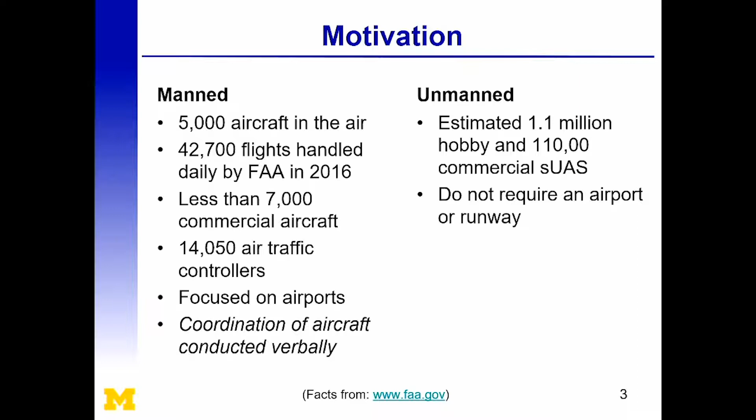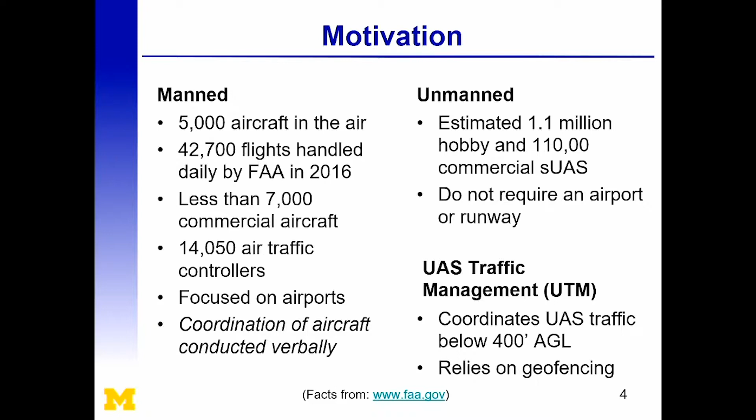So then that brings in, what is geofencing? Geofencing is the idea that we can create a three-dimensional box around a drone and then confine it within that space. So if you're flying in your backyard, you put one up around your property boundaries and you say, okay, as long as my drone respects my geofence, I don't have to worry about the neighbor's house or interfering with any other air traffic that's in the area. It also works in reverse. So if you're living next to an airport, there can be a keep-out geofence that prevents you from getting too close to where the manned aviation is.

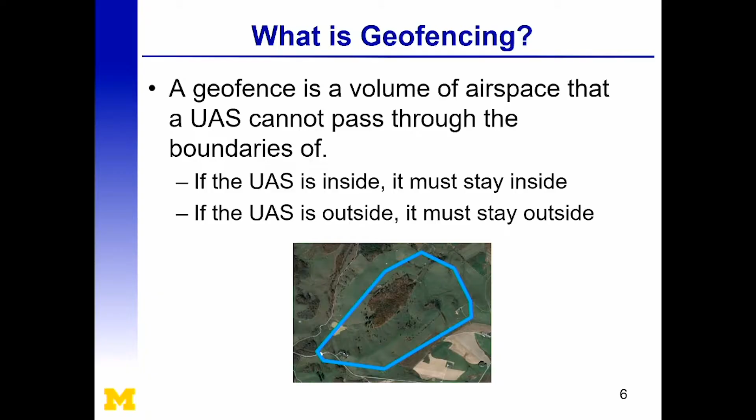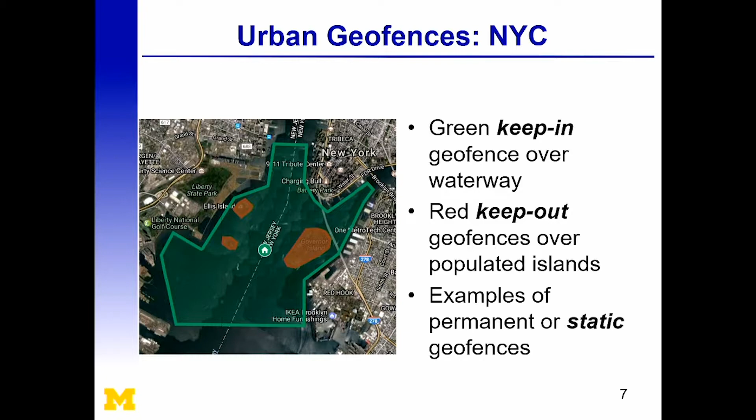So this is a subsection of the area near New York City. If we imagine that this green area is a keep-in geofence, then the idea is that you can have traffic going across the river back and forth. As long as it stays within the green area, it's allowed to be flying there. What you see in the red are examples of keep-out geofences. I've put those over islands that exist within this river, the idea being that you don't want those aircraft flying over a high population area. So if you tell your drone where the geofences are, it can fly anywhere within the green and it'll avoid the red areas, and you can safely operate within that space. And these are all based on physical markers that are always there: there's always people on the islands, the river's always there.

This is an example of permanent or static geofences. If we then imagine that there is an emergency vehicle that needs to cross this area, say it's a helicopter or an emergency flight or a police vehicle that needs to get from one side to the other, it can come in and say, hey, I need this airspace because I need to transit through here quickly. And so in that case, it actually overrides the boundaries that are already there for the period of time that it's going to occupy that airspace.

To make this the most useful system possible, we're focusing on non-convex. We're not enforcing any convexity requirements, so the horizontal boundaries of our geofences can be any shape we want. And we do want these to be enforced, time-dependent geofences so that you can trust that nobody else is going to violate your geofence, and that geofences only exist as long as they need to exist to keep the airspace less cluttered.

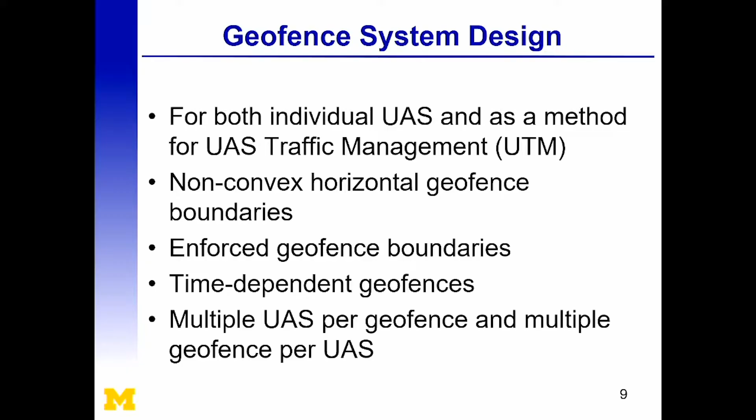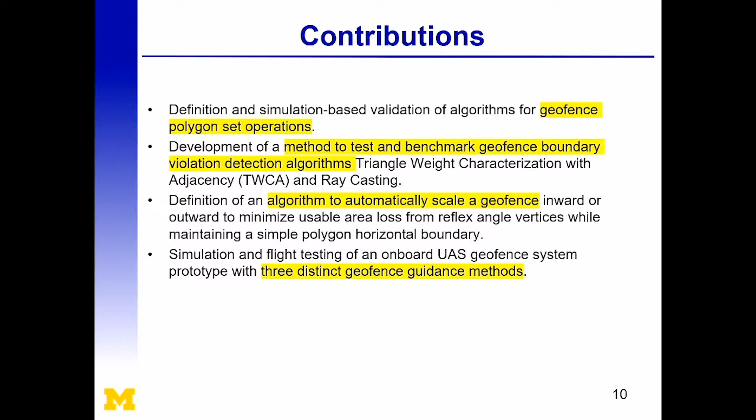The contributions of this work are using polygon set operations within this interface to track the creation of these geofences. We've developed an algorithm and a benchmarking method for detecting whether or not a geofence is being violated. And we've defined an algorithm to automatically scale geofences inward and outward to maximize the usable airspace and to be able to provide warning layers, which I'll get into in a bit. And we've also done a lot of the simulation, and we've implemented 3 distinct guidance modes. So that's the response to when a geofence is potentially violated. Again, all of this we'll get into a lot more.

The innovations are, in fact, a formal definition of the UAS-centric geofence, which has actually been missing in the community so far. Most of the work that's been done, everybody's coming up with their own locally used definitions. So we've designed one that should be adaptable to any use cases. These are 4-dimensional geofences, and we have a way to store them within a centralized system so that we can track at any given point in time which geofences are and are not active.

We have a custom algorithm called triangle weight characterization with adjacency that allows us to quickly, over time, track exactly where we are, which is faster than the normally used algorithms. And we have a guidance mode that's been unique to us and actually been picked up throughout the community called local Loiter, which is the idea that when you detect a violation, you don't just stop where you are, you don't fall out of the sky, you actually back off from the geofence before returning control back to the users.

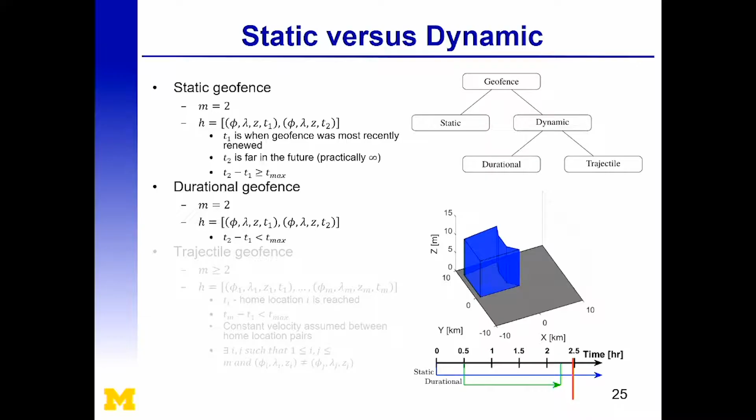Okay. So then the final term is our add IDs function, which is our permissions function. This is saying who is allowed to access this geofence. So if it's your backyard and you're the only one that wants to fly there, you're saying, okay, only my drones can fly here. But if you're friends with your neighbor and you say they can fly here too, then you have your drone's ID number and your friend's ID numbers.

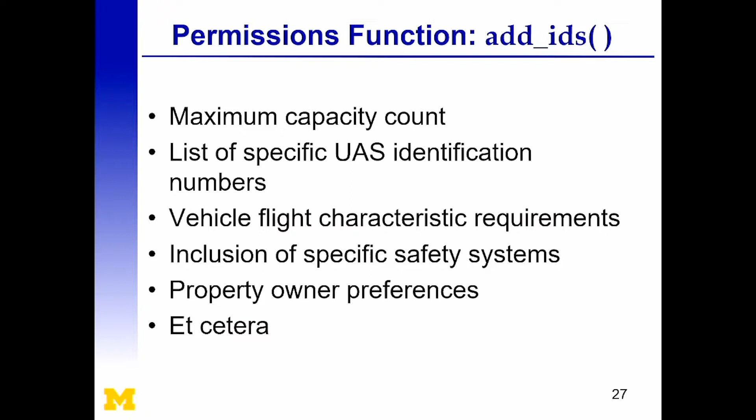For more open public spaces, maybe your local flying field, you have to be a member before you can fly there. So you have to get your ID on that list, and then anybody who's a member can fly in that area. Alternatively, it could be like a public park where no more than 10 drones can fly here. So when you request that geofence, the system checks whether or not it's already at capacity, and you potentially have to wait until somebody else lands before you can take off and use that geofence.

And so this is really where a lot of the policy that's going to be springing up around these geofences is going to be enacted, which goes into property owners' rights and who can fly where and who has that ability to determine that. And so that's all encompassed within the add IDs function. So that's how we implement it for an individual vehicle.

How does it look from the system side? Again, we're going to stick with the same definition. Our first task is we want to be able to track both the geofence and the vehicles that are occupying those geofences, because it's not just what airspace is used, it's who's using that airspace. And so to do that, we're defining our UTM system with geofences that are sorted temporally and then spatially deconflicted.

So I'm going to go through the temporal side, and then I'll go to the spatial side. So we're going to divide this up into temporal periods, which is just a space of time where all of the geofences are constant, so there's no change within that space. And it's defined based just on a start time and a list of geofences that are active during that time period.

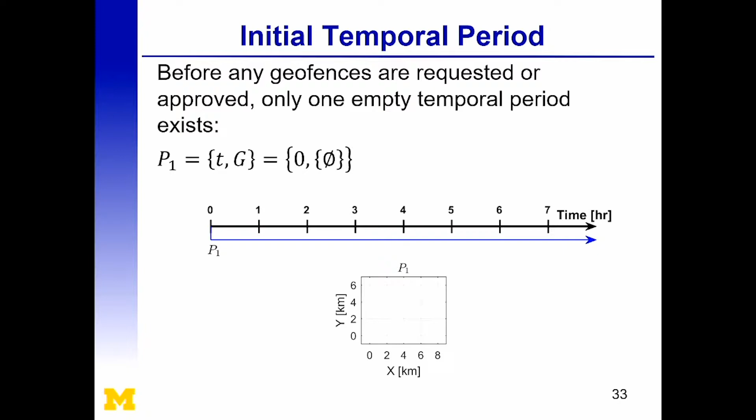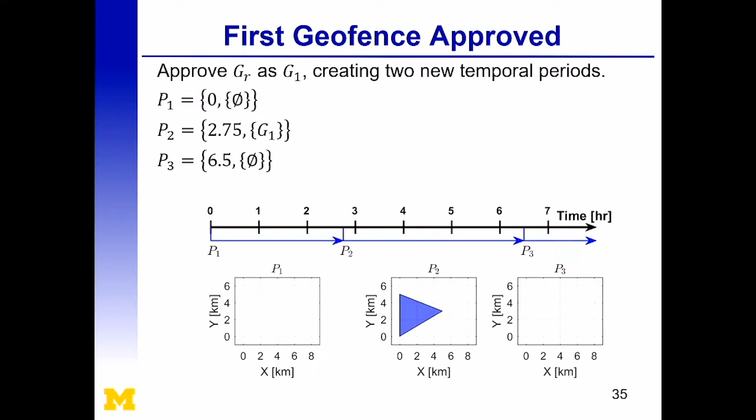When we first turn on the geofence system, you have a single period and it starts at 0, and there's nothing there. No geofences have been requested yet, it's just an empty period. So then we have a first geofence request, it goes into the system and it says, okay, can I have this airspace? There's no other geofences active during that time, and so that becomes part of it, and we now have 3 temporal periods. One for before that geofence exists, one for while it exists, and then another for after it exists. So a single case, okay, easy enough.

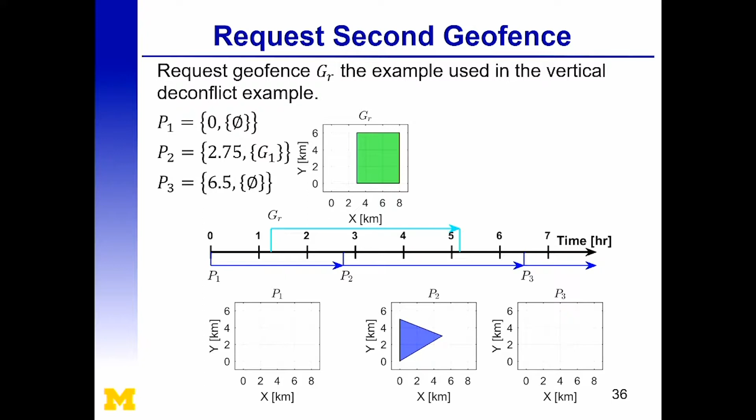Then we get a second request that overlaps but doesn't actually align with any of the same time boundaries. And so when this gets approved, we actually end up with 5 different temporal periods where numbers 2 and 4 have only a single geofence occupied, so those are the full boundaries that are requested. But the interesting one is down here in P3, which is where the spatial deconflicting is going to come into play.

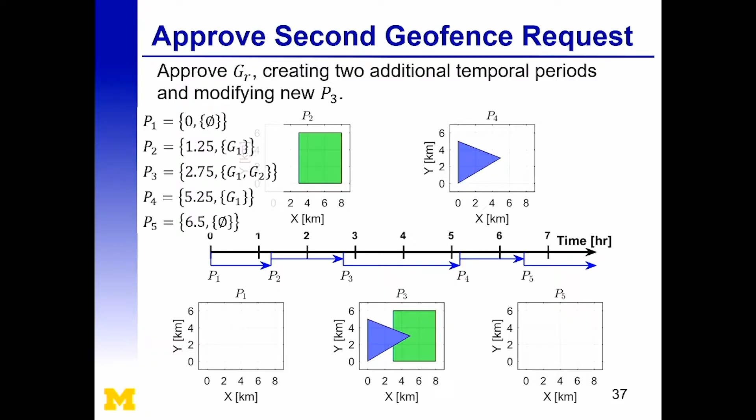So with those geofences that are now created, who has permissions to fly there and how do we track that? With our permissions constraints, we look at each of them and we create a list of the active or scheduled users for that geofence. And so for our timeline, what that really ends up looking like is we have a list for each of the periods with an entry for each of the geofences, and within that is the list of UAS that are active within that period. Okay. So that's how we're tracking who's using them or who's scheduled to use them, and that allows for the monitoring of the airspace itself.

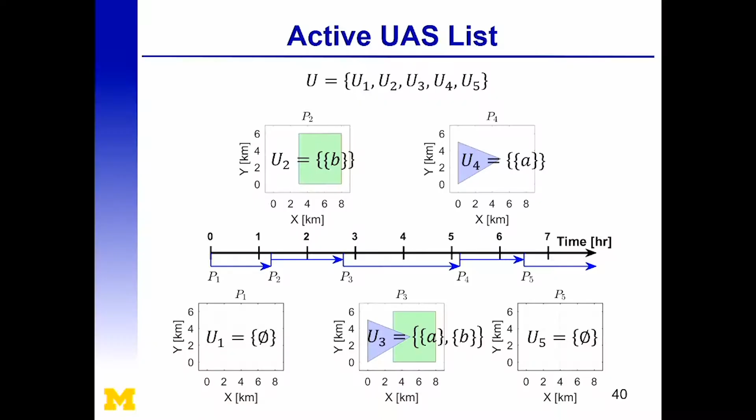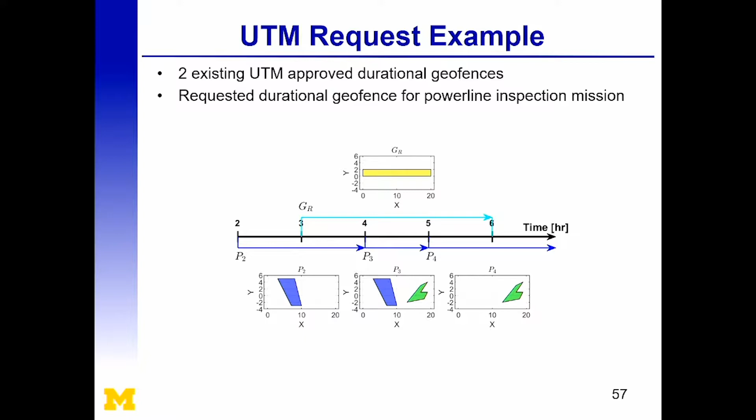So another example to hopefully solidify this a little bit more: for this one, we're imagining that the ones on the bottom here already exist and are approved within the UTM system. And so then we're requesting this lovely yellow geofence that is intended for, say, a power line inspection. And so we ask for that geofence. And then when that is approved, we get, again, separated out into 5 different temporal periods, where for each period, the yellow geofence is deconflicted from the existing 2 geofences.

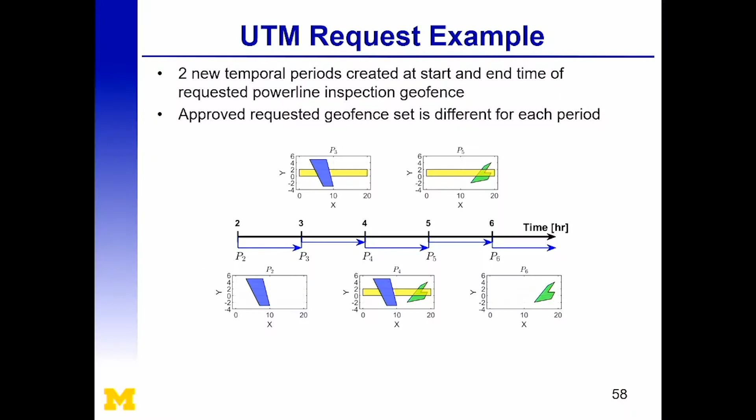So what this looks like in 3 dimensions, because we're flying in 3 dimensions here, we get this area where for the first hour of the existence of our survey geofence, it's actually separated out into 2 different disjoint sections, which means you can't actually fly from one to the other with the currently requested geofences. When we get to P4, it's even more broken up, but because the vertical boundaries of the green and the yellow are different, you can actually possibly hop over the green if you change your altitudes there. And then with P5, you finally have access to that center section and can make it across the whole area.

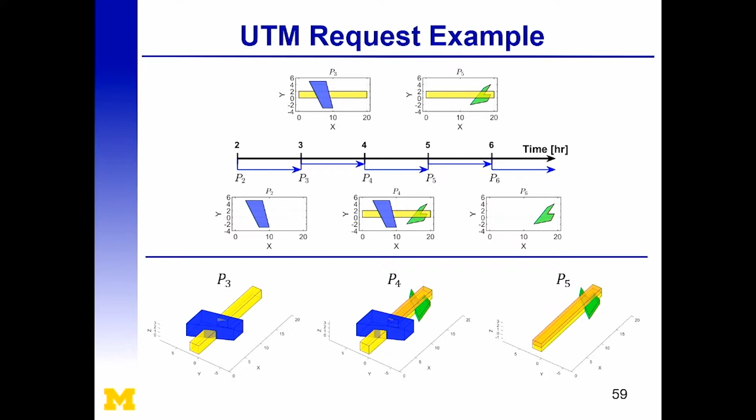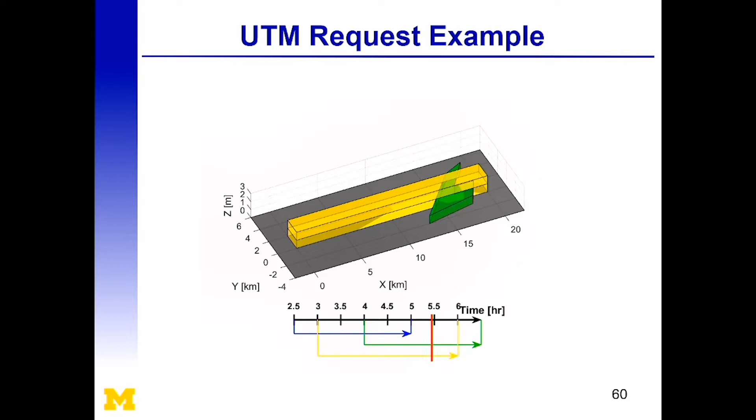So 3-dimensionally, what this looks like is here you can kind of track what's happening. They appear, and then as blue disappears, we then have that space. But at no point in time do we have access to the entirety of our requested area. Over time, we can access all the different components, but we can't actually access them all at the exact same time. And so then what that looks like is if you assume that you have to start from 0 and proceed to 20, maybe you're surveying something over on the side, then you start off there and you have to go slow so you don't hit that blue boundary.

So here we go again. Okay, so you're going really slow so you don't hit the blue because you don't have permission to fly there, and so you're waiting. And then as soon as that disappears, you have to make it all the way across for the rest of your time, and so you're racing much faster then, and then hopping up and over that green boundary because it's taking up where you want to be flying, but you have permission to go up and around, and so you do still get the entirety of your area that way.

The other way to do this would be if you can start from the other side, then suddenly you can make it across from where the green's going to and survey that area first at your desired altitude, and then just wait for the blue one to disappear to finish the rest of your survey. And so this is the simple 1 vehicle case. Especially if you start adding more vehicles and more varied flight plans, there are an infinite number of ways that you can cover this same area. But this is the simple idea of how they interact and how it is going to impact the flight plan of the people that are actually trying to use this airspace.

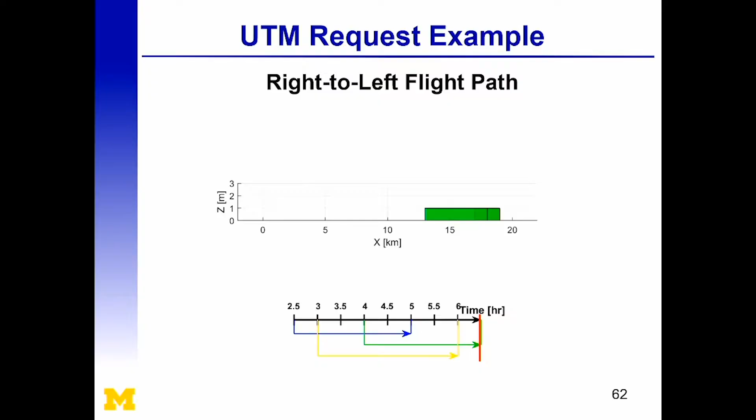So that's our high-level introduction to what is the geofence, what is our formal definition of it, and how are we tracking them compared to each other. So the next couple sections are going to be focusing on a single geofence at a time so that we can really get into the nitty-gritty of how does it work for the vehicles that are running this system. So to do that, we start off with our boundary check algorithms. This is how do we determine whether or not we're respecting our geofence boundaries.

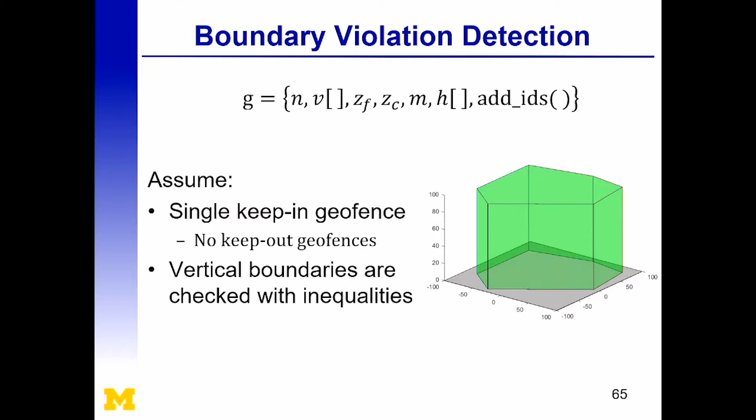So we start off again with our geofence definition and a single keep-in geofence, where again, we can just check the vertical boundaries with simple inequality. This is actually just an application of the point in polygon problem, if you're familiar with that from computer vision or graphics or computational geometry. And so the most commonly used method is ray casting, and the one that we're proposing as an alternative is triangle weight characterization with adjacency. I'm going to kind of fly through this section, but if you want more information, it's in papers.

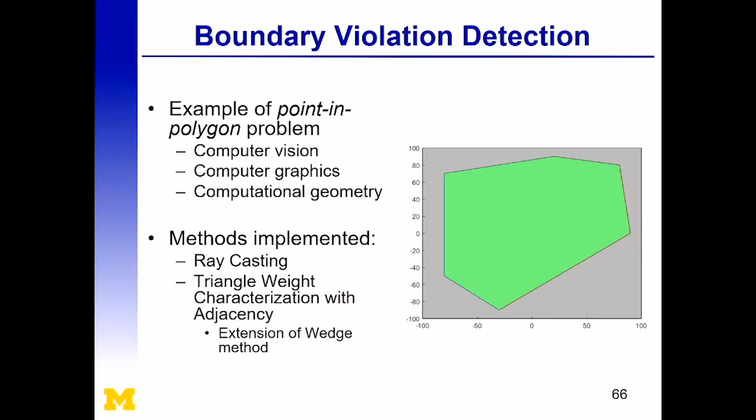So triangle weight characterization: we start off with our funky polygon, and we divide it up into triangles. Once you have triangles, because it is a convex hull in 2 dimensions with 3 inequalities, you can determine whether or not you're occupying any of the triangles. And then with that simple check of whether or not you're in a single triangle, what we actually want to do is then create a graph.

Because we're a vehicle moving through space and we are not teleporting, we know at any given time we're probably pretty close to where we were previously. So as we fly through here, we're assuming we're always within the same triangle, or we're doing a breadth first search of the adjacent triangles, where adjacency is defined as a shared edge. As we continue to walk through, it's fine, but if we violate our boundaries, we have to suddenly check all of the triangles for containment before we know that we're actually outside.

To remedy this, we add a bounding box around it, which is just a simple rectangle that we again divide into triangles, and then we add that into our adjacency graph. So now we know that even when we're outside the geofence, we're still somewhere within that graph. And if we make it beyond that bounding box, things have gone very wrong already, but the bounding box can be checked with just a simple series of inequalities, so it's a very quick procedure.

The number of triangles here is still just scaling linearly with the number of edges, so our runtime is still very contained, which is what we're looking for, because ideally this is running on board at the same or a very similar pace to what your autopilot's running at. And so that is where this is letting us really go, and it lets us be a lot faster.

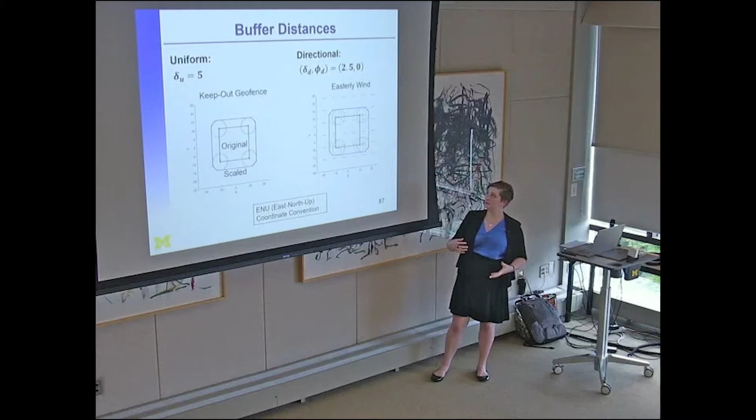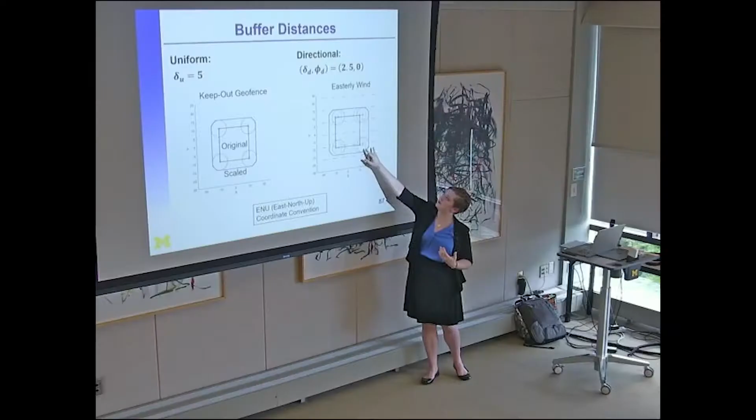And so here we've got an easterly wind, so if this is a keep out geofence and you're flying towards it, because you're with the wind, you need more space to stop, right, or to turn back. And so that's why it's a larger distance here than it is over here. So we have the same uniform distance all the way around with that additional padding on this side to account for that wind and that directional component.

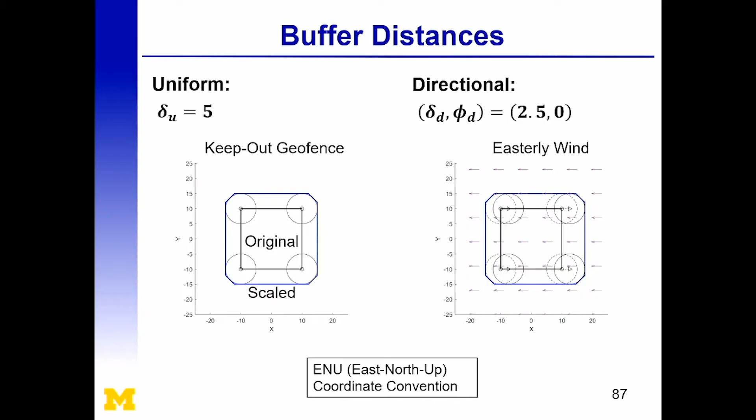So how do we calculate this? For hover-capable vehicles, which is your quadrotors, your octocopters, whatever your custom build is that can just sit up on its tail, for the uniform, we're just using a simple distance with assumed constant acceleration calculation, which is pretty straightforward, you'll probably recognize this from high school physics. It's just our airspeed squared over twice the acceleration that we're going to be commanding.

Then for our directional component, we're using the same equation, just with the addition of wind, and then we subtract off our uniform buffer so that it's only in the direction. We only apply this on the side of the geofence that we want it to be on.

Where it gets interesting is when we look at the directional side. To do this, we're looking at the aircraft equations for doing the turn within wind, which is what you see up there. And then if we look at the velocity component of that, we can solve it for t, and that gives us the additional time required where if you're flying with the wind, so moving faster than what your airspeed's reading, this is the time that it takes for you to make that first turn and to stop your forward progress in the wind.

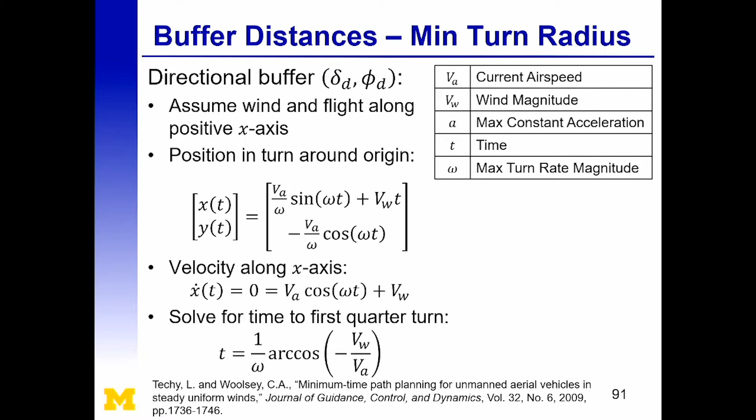So for fixed wing, this is how we would be determining our uniform buffer and our directional buffer. And because we have these equations for both vehicles that are capable of stopping and coming to a hover and those requiring a minimum turn radius, we can then use these buffer distances moving forward in our calculations.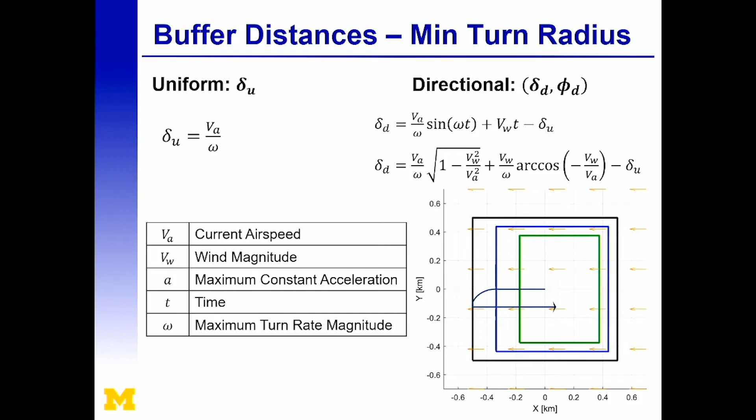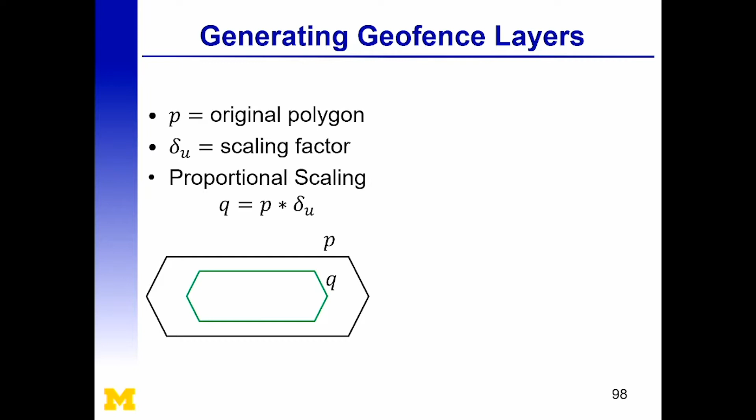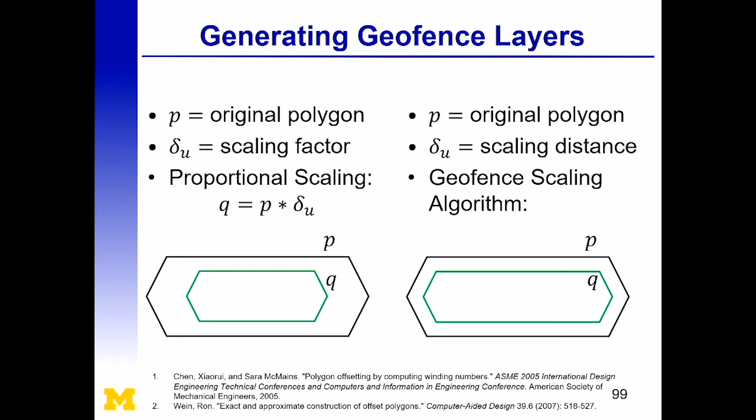So to actually scale the boundaries, we can't just take the vertices and multiply them by our desired scaling factor, because for non-symmetric boundaries it doesn't work, and especially once you get into our concave messes of geofences, it doesn't work at all. And so what we actually do is we go edge by edge and scale them inward by our distance, so it's consistent through each of the vertices as much as possible.

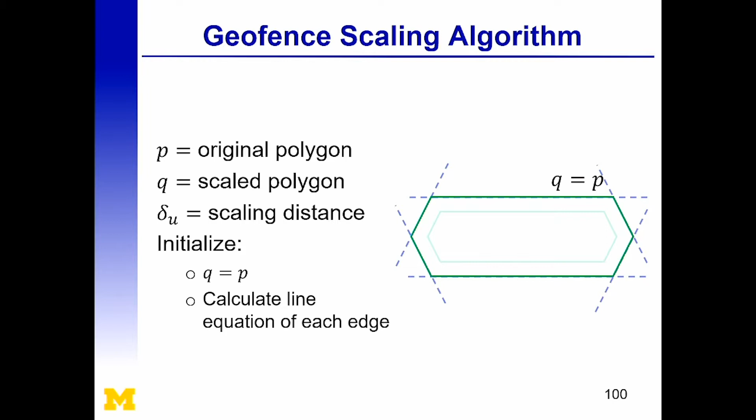And so to do that, we start off by just analyzing the existing polygon and noting the equations of each of the edges. And then from there, we take each of those edges and we project them either inward or outward, depending on which direction you want to be going. And what we really focus on preserving is that the slope of each of the edges is preserved as we move inward. And so by keeping that same slope, we define the new vertices as where the new intersection points are between each of those edges.

And this is really where the smoothing helps, because once you're projecting inward, if there's edges that are too short, the projection inward kind of closes them in on themselves; that smoothing gets rid of it, so then we do have this nice, simple inward movement.

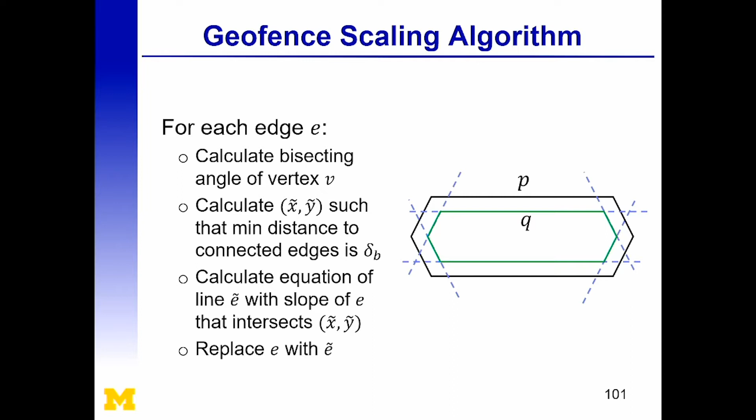And what we're going to do is we're going to add an additional vertex at each of those points, so that we actually end up with a flattened edge across each of the vertices that's perpendicular to the angular bisector of the original angle. And so what that lets us do is we regain a lot of usable airspace. The optimal implementation would be to use an arc, but because one of our design parameters is that we're only using straight edges, this is our solution.

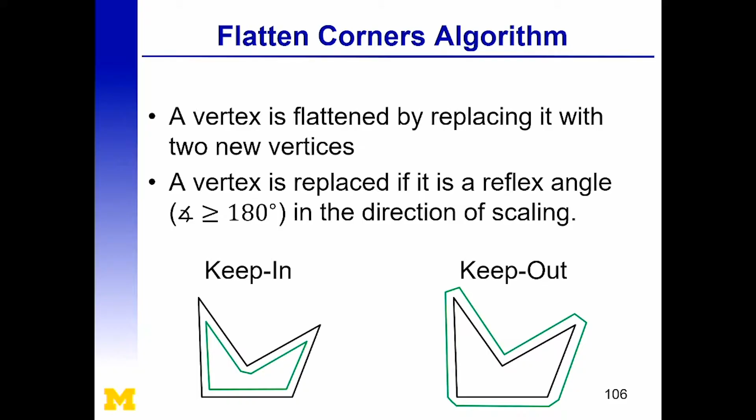And that's what cross-check is doing: we start off and we look at where our scaled boundary intersects with itself. We divide those into their own little subsections, which we then recombine to create the polygons that make up our scaled version. And from there, we can check to make sure that the vertices and edges that define those polygons respect our desired buffer distances, and then eliminate any of the ones that don't comply. And so with the addition of this final step, we can retain the two sides without having to redefine the original geofence to eliminate the narrow passage between them.

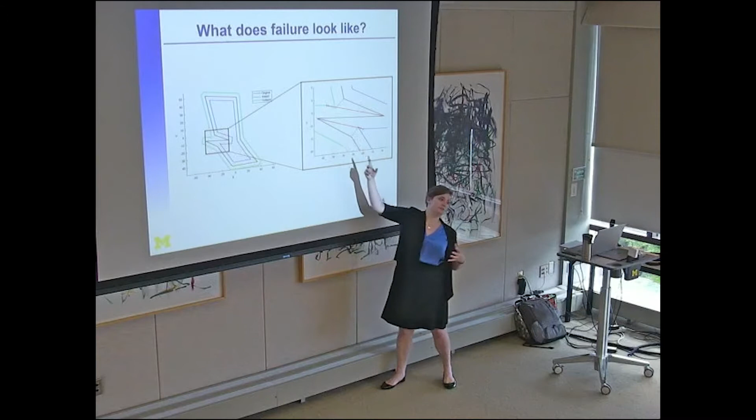So green is our outward scaling, and the red solid line and that dotted line are connecting the vertices from before and after they were scaled. And what you're seeing is that little cross up there tells you that you've actually caused a switching in the order of vertices that's led to this little bitty nub being too close to the original boundary. So that's why that is a failure case.

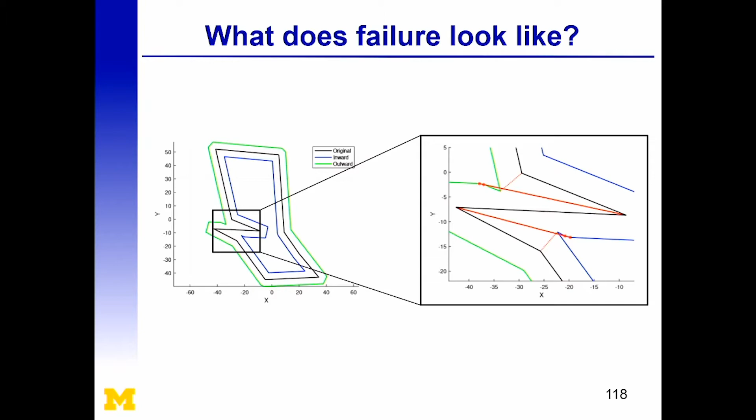We see the same thing over here with blue, where the red lines cross, and it's what most of our failures look like for this data set. And what this is really telling us is that our smoothing algorithms can be improved, because if this was properly smoothed, then this edge for our inward scaling would have been removed, and this would have just been a single vertex instead of the 2 we're seeing here.

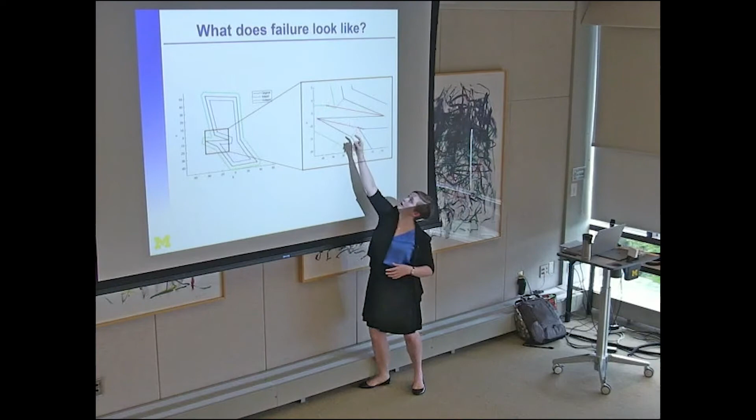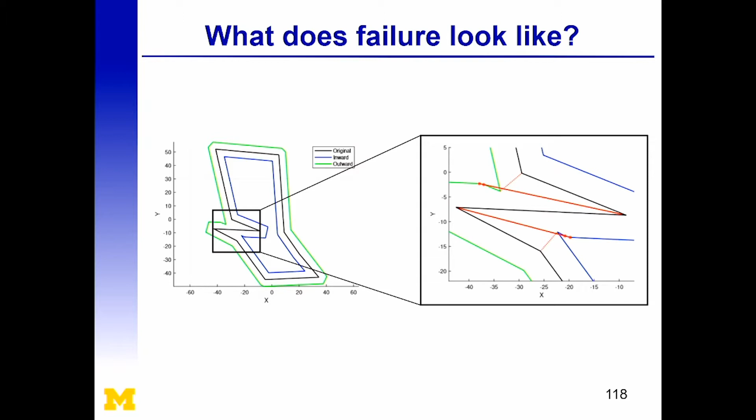And for the outward case, it would have removed this upper black one that I can't quite reach. But that would have, again, reduced this section down into just one vertex, so there would be no edge to cross itself there. And so that does suggest that there's additional work that can be done in the smoothing to further improve these results numbers, particularly on the far side of these graphs. But those are the failure cases that we're seeing.

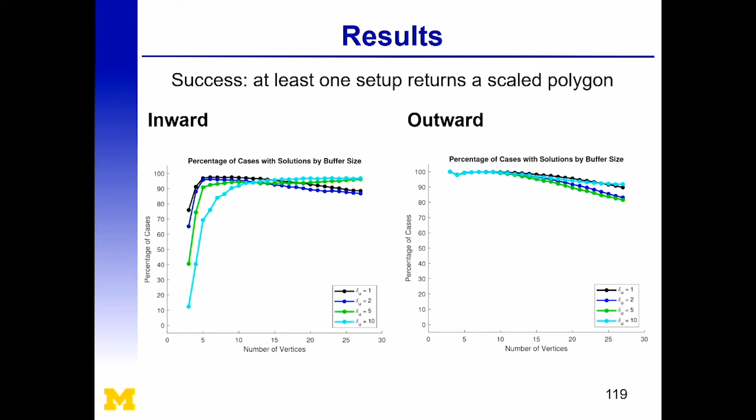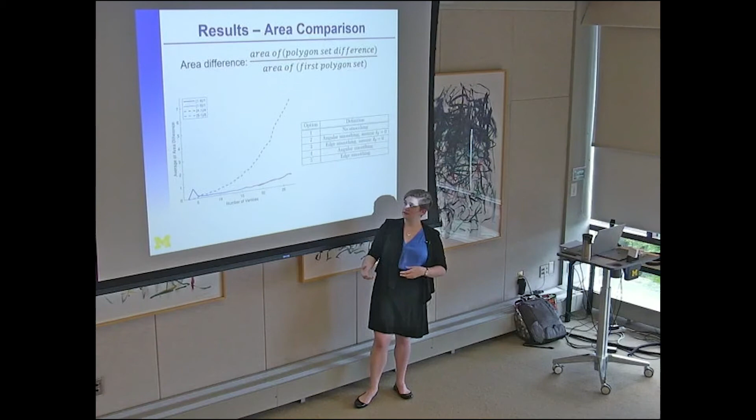And so that's a pretty constant percentage of the area. Whereas if you look at it from the other direction, what does the smoothing case incorporate that the original case doesn't, we see a consistent increase in the area difference as the number of vertices increase, which is expected because you're removing those areas that are closing in on themselves, and by approximating that, you actually get that added area back.

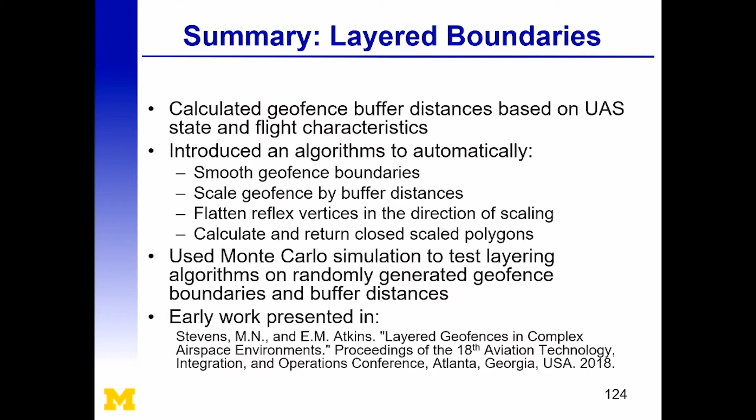but they're very closely knit. And so really what we want to be doing is run multiple smoothing methods over each geofence and then just select the result with the most area, because again, from the user side, you just want to maximize the area that you can use for your flights. So that's layered boundaries. We have an early version of this work that was published last year in a conference, and a journal paper that's hopefully coming soon. It's been submitted, so it's in the process.

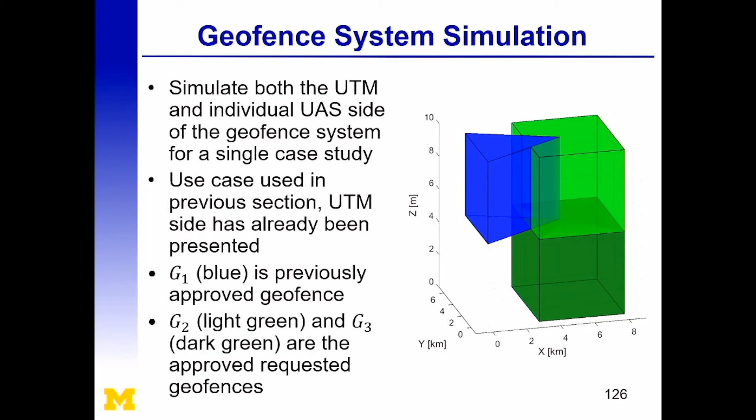And then the final really interesting section here is how do we combine all of this back together? So I've shown you a bunch of individual components, but it's pretty disjoint at the moment. So we're gonna go back to our lovely blue and green geofences which are slightly offset. And we're gonna say, okay, we're interested in our green geofence as it's been deconflicted. And so we pull it out and we look at each of the two sides, where our lovely rectangle is the lower portion that didn't have any conflicts, and this one is our upper portion. And so we take those and we generate the layers for them.

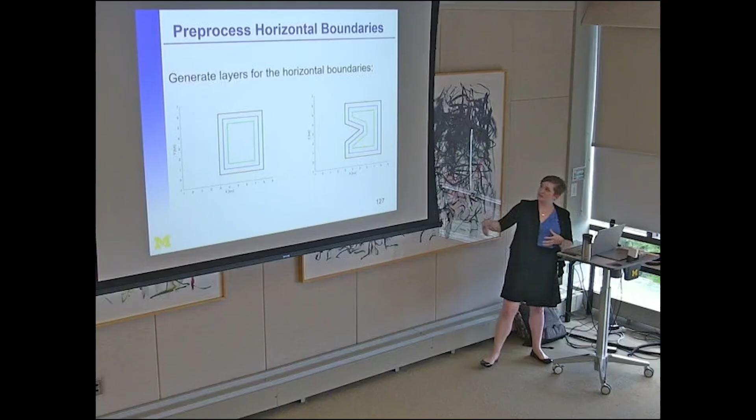And as you can see, we have some of the edge flattening going on here, which is why these are much nicer boundaries, they're not a sharp spar. There's a lot more usable area. So then from there, we divide not just the original geofence and the bounding box, but each of the layers as well into triangles. So we're tracking whether we're within our desired flight area inside the green, or if we're in our warning area, or are we in our override area, or has something gone horribly wrong and we need to do something else.

So if we then consider we have a couple little quadrotors flying through our area, if for some reason they manage to get a waypoint that's outside of their original geofence boundary, as soon as they start crossing the blue, we bring them back and down to the green. This is our local loiter guidance mode, which is really, as soon as we hit the blue, we begin decelerating the vehicles, and then we bring them back into the warning area. So the idea here being that you want to bring them back far enough from the boundary that they're not going to just immediately violate the boundary again. And so this is our favorite of the guidance modes.

The kind of default, familiar to everybody idea is the return to launch. And this is the idea that we're going to make a beeline straight for our home position, which is okay, but not great. Because actually, if you watch the one on the left, we're getting a full geofence violation there because of this guidance mode, which is the exact opposite of what we want, because our override boundary is stopping us from violating it on the top, but then we're actually causing a full geofence violation in our response.

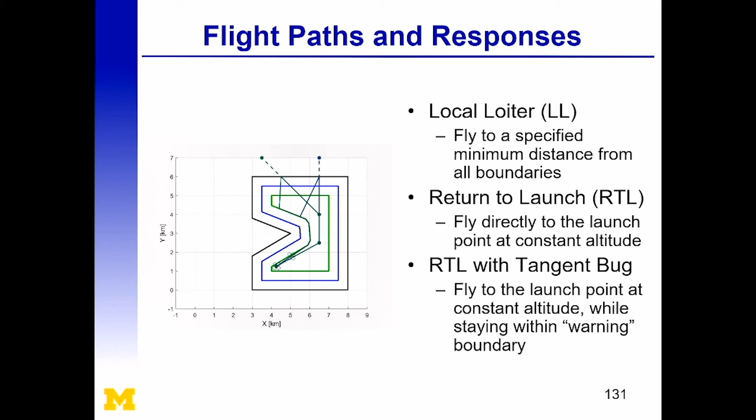And so to adjust for that, we introduce a simple additional path planning step, which is that once you're within the green, if you can't make it straight to your home position, you employ a simple guidance mode such as wall following or tangent bug as written here, where you stay within that green boundary and you just follow it until you can get your clear line to the home position. And so these are some of our proposed guidance methods that are pretty consistent with what's being used out there as we're moving forward. So that's what the system looks like when you're using it as a full system.

And so, again, some of this work has been presented already at conferences, but we're in the process of wrapping that up into a journal paper at the moment. So then, I guess the final part is just the conclusion of all of this.

We've created an algorithm that lets us quickly determine, using prior knowledge, whether or not we're violating our geofence and where we are located within our response requirements. And we've developed the boundary scaling and the guidance methods. And so all of that comes together to what lets us have a system, at least in simulation, that really does well for both the UAS side and the system side of managing these geofences and allowing their creation and propagation. And so looking forward to what else there is to be done, it's huge.

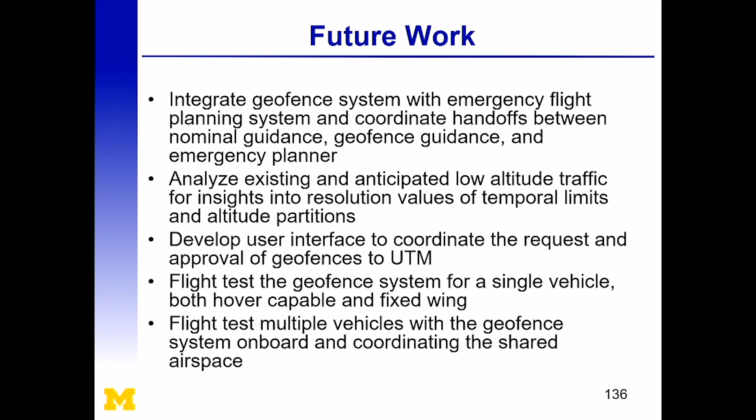And with all of that, there needs to be a lot of flight testing. Most of this has been done in simulation. Some of the guidance stuff has been developed in flight testing, but the vast majority of it is simulation-based, and I think there's a lot to be learned, especially with the buffer distances and our guidance modes, through the flight testing, not just with hover vehicles, but with fixed wings as well, because while you can anticipate a lot through simulation, there's a lot that the real world's just going to make very clear very quickly. And so I think flight tests moving forward should be a big component of the future geofencing work. And with that, I'd like to open the floor to questions.